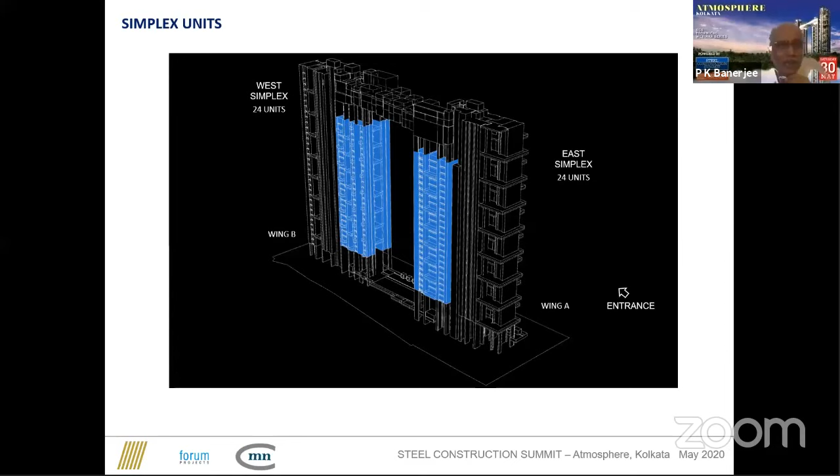So far, this building is nothing great as conceived. The greatness comes when Rahul, along with the architect, connected these two towers with a sky bridge at a level of 100 meters plus. You can see this sky bridge in this display.

This is not just a bridge - it is a steel structural bridge. The towers are made of RCC, whereas this steel structural bridge is not only for moving between towers. It is a 3-storied block comprising all the utilities and amenities a high-end dweller can expect.

This bridge has its own swimming pool, jacuzzi, kids pool, gym, party deck, view deck, spa, salon, party area, conference room, home theater - whatever one can expect for the best, higher standard of living.

All amenities are put inside this 3-storied bridge, which has made the building a landmark project. It has been captured by CTBUH also and placed in the list of unique building structures of the world. There lies the beauty, there lies the uniqueness.

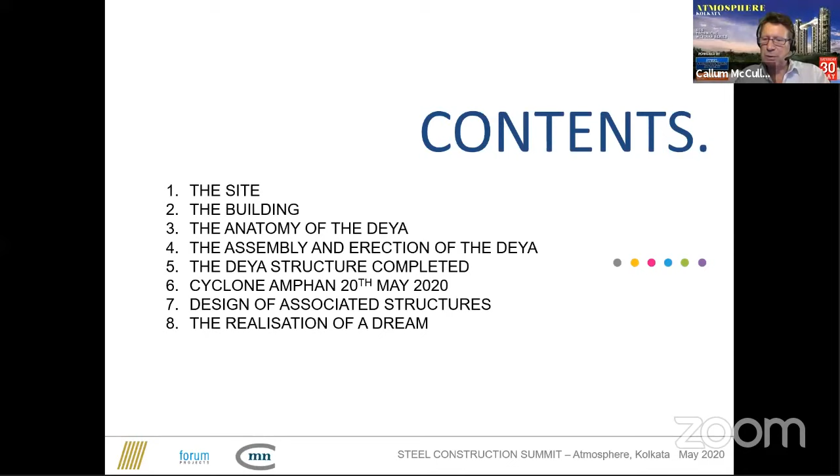It will be quite straightforward, and let us begin with where we started. We started on the site. The site was empty when we started. This was December 2010. This project has been 10 years in the making, but we do have a little bit of video here, which actually reveals PK and our client and the absolute absence of any high rise anywhere nearby.

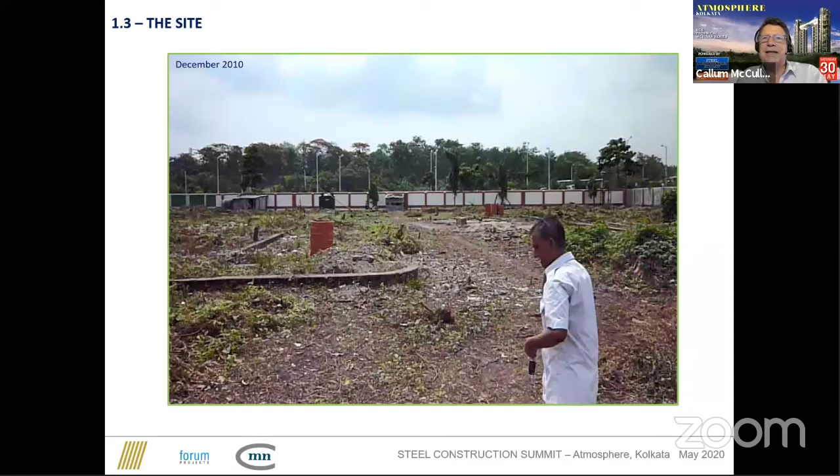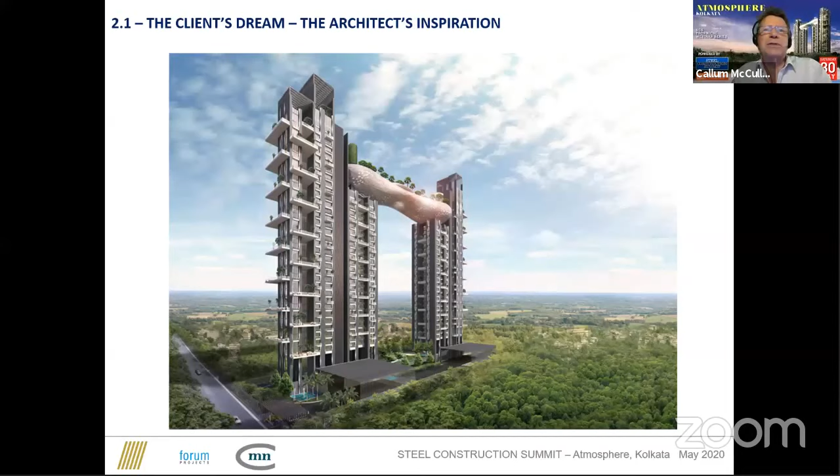The architect liked it, and we built up the whole thing into this - the architect's impression like this. Of course, the structural engineer has to become involved, and he has to do his visualization as well.

And the engineering gave us a piled raft, a single-story basement, a 5-meter high podium, which we will describe later, also known as our E-deck. Reinforced concrete frame, typically 5.1 meter story heights, very high. A big steel grillage, which we will enjoy looking at later.

And of course, the steel Deya, which sits suspended on 4 bearings between the 2 towers.

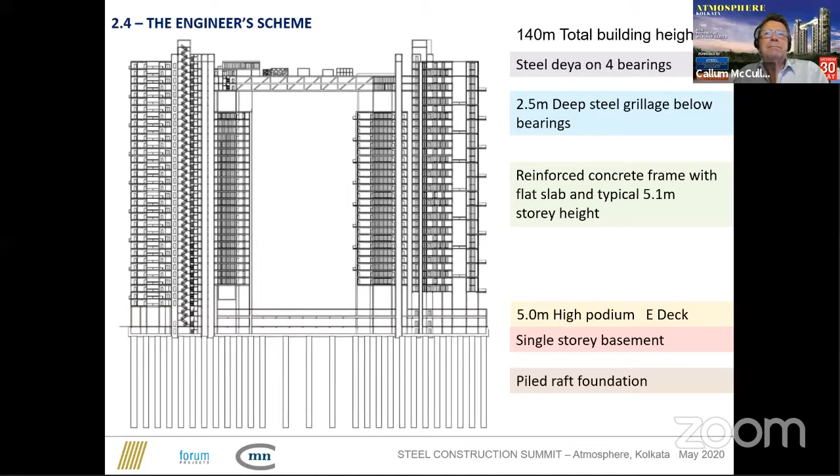Now, to think of the anatomy of the Deya - the Deya is supported by the towers. The towers use bearings to support the Deya. The Deya itself will do what it wants, but we want it to do things.

We want the towers will vibrate under load. They will move around. These ones will not move around in the same manner. They are asynchronous - we have analyzed them. They're not going to move together. So while taking the substantial load of the Deya, we have to accommodate their movements.

The Deya itself will take the lateral load from the wind, will support the swimming pool, will provide all the facilities that are required, and the bearings must interface the two to enable damping and isolation and to ensure human comfort, and also through this provide safety for the towers, ensuring that the three work together harmoniously and to the mutual advantage of them all. To do this, we actually undertook analysis.

This is analysis that we undertook, which simulates earthquake loading. Light loading, you can see the towers move gently together, largely, not much in the way of differential movement. But of course, we have to allow for the earthquakes that do hit Kolkata, not unusually, sometimes very severely. When this load is applied, then the buildings will start to move in a different manner.

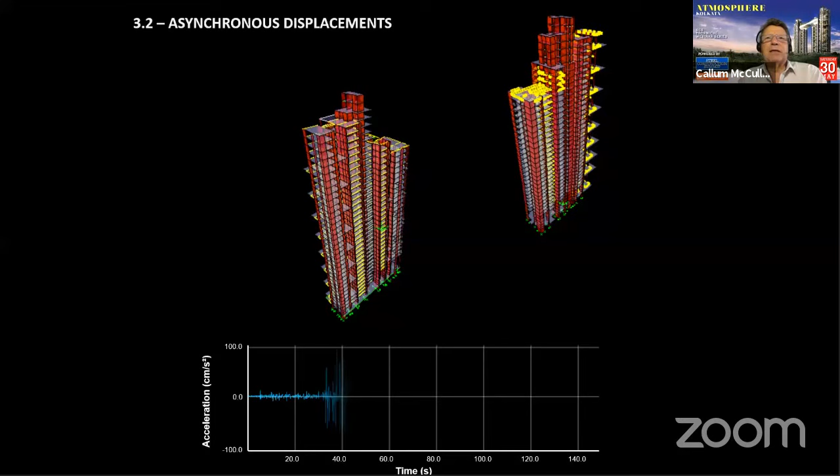They still seem to be moving a little bit together, but because of the detail of the structural arrangement, you can now see that they are starting to twist against each other. Thus, our Deya has to accommodate this differential movement between the two.

And the bearings that support that Deya have to be very carefully considered. We went through many, many options. Here are just a couple of them. We could pin at each end. Yes, but if we do that, then all the load from one side goes directly into the other side. This is not desirable load on the Deya or applied to the other tower.

We could release one end using a roller or a ball connection. This is true, but then one tower would have to support all the inertia of the Deya. That's not the best arrangement.

What we've settled upon is base isolation at both ends. All the Deya sits actually on 4 bearings, 2 on each side. These bearings are sprung loaded in all directions. So thus they mitigate the seismic demand by reducing the motion from the Deya into the buildings. It is taken up through the sprung loaded bearings.

This improves the human comfort aspect because the Deya itself acts as a damper on the buildings. In the same way as a tuned mass damper or a hydraulic damper would do, our Deya provides damping for the towers. And in addition, the spring nature of the bearings means that they are restored to their original position after any event that causes them to move.

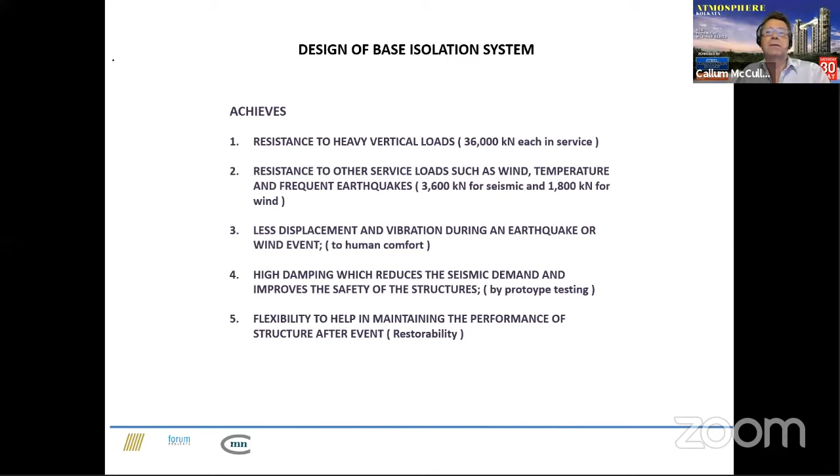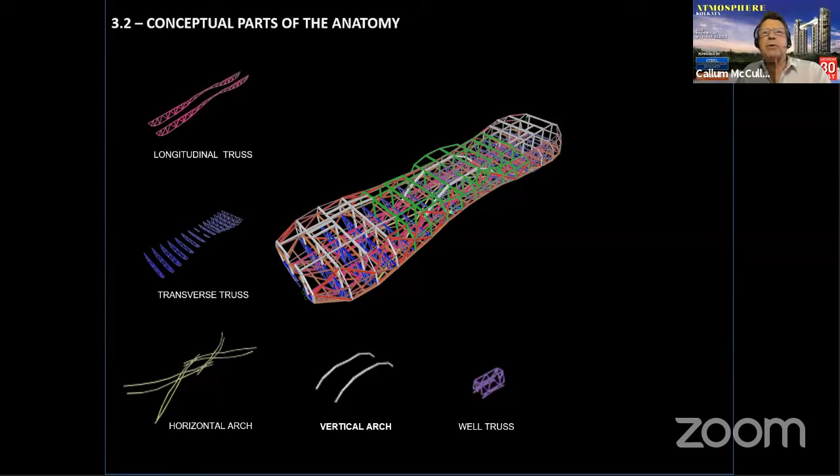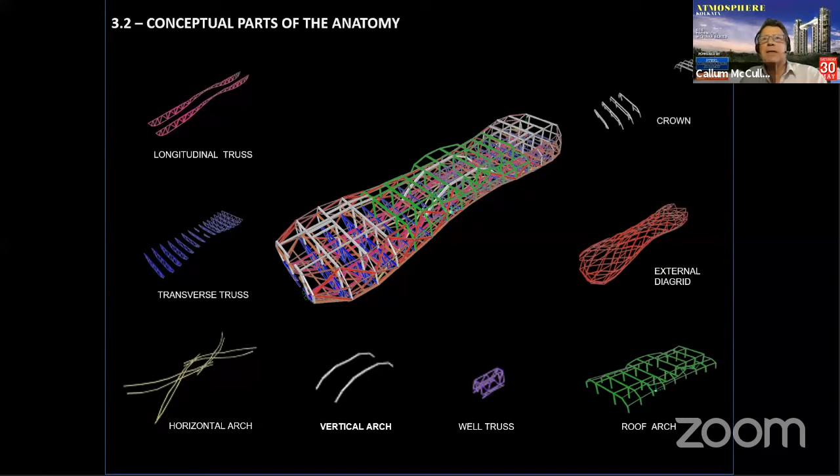Because of the shallow cross section in the middle of the structure, a vertical arch, which you can see here, was added to strengthen the longitudinal truss. In the middle, there's an oculus. A separate truss was required for that because it disrupted all the other trusses. A roof arch to start providing space. Externally, a diagrid to provide rigidity into the Deya, resist twisting effect, and provide a surface on which we could start building the cladding. And at the end, to suit the architecture, there was a crown required.

That was the design. But in addition, we had to consider other aspects. Once we had a structure that worked, we had to add in the final condition additional members which were required to suit the erection process.

So these characteristics, these loading was provided by Eversendai through our checking systems, and we doubled up wherever we could. Then we had additional elements for additional floors, which did not form part of the structural framing, which we had to add in. And in addition, our client very sensibly had bought a load of steel, and there were certain cross sections, certain sections that were determined by the availability of material. This was, we considered to be a good green move rather than producing loads more steel unnecessarily.

So all of these things provided a refinement, shall I say, to the anatomy of the structure. Then, having decided on this design, is how to assemble it, how to put it together.

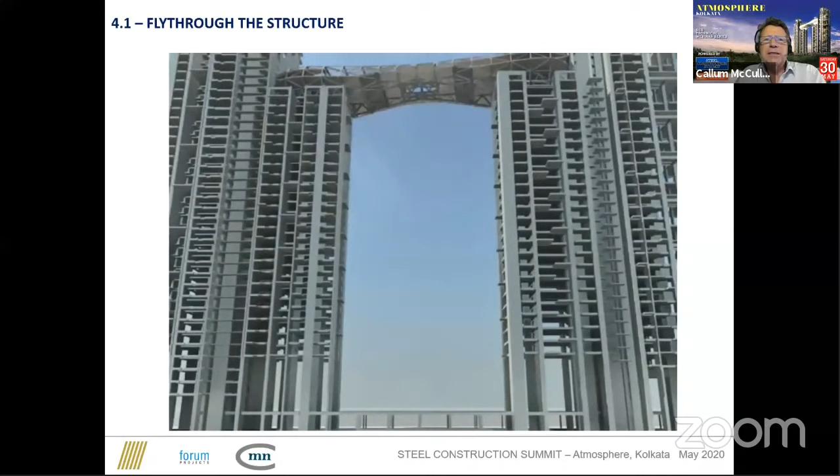It's high up, it's complicated. We have an area here that we could work away from. We have a very robust structure on either side. Flat slab structure, very, very few beams, but very eccentrically loaded.

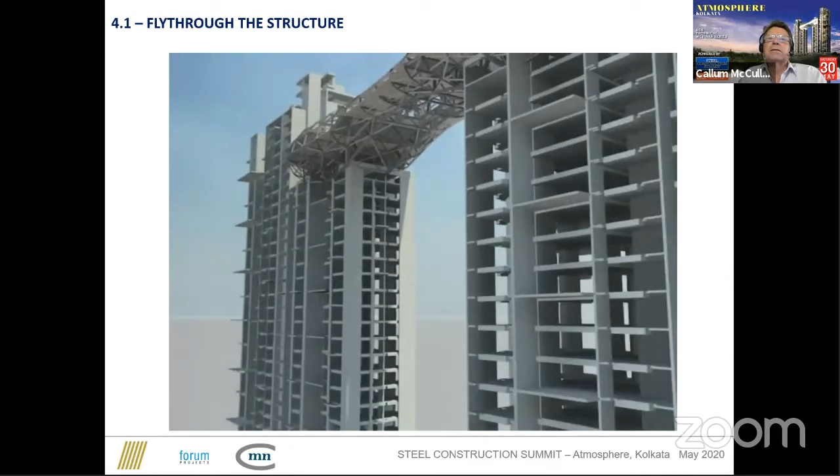Coming up to our Deya, how do you put that up there? Well, the first thing you need is a very solid landing strip for it. This is a view onto one of the grillages that support the bearings. These beams are 2.5 meters deep each. And because, as you will see, the towers do not line up, they are eccentric because of the skew that exists on the loading.

These are taken down into the concrete walls of the main tower below. To fabricate the Deya, this was going to be done in Tiruchirapalli, Trichy, for some of us. It was decided that we would fabricate the nodes to start with and ship them up individually, assembling once we got to site.

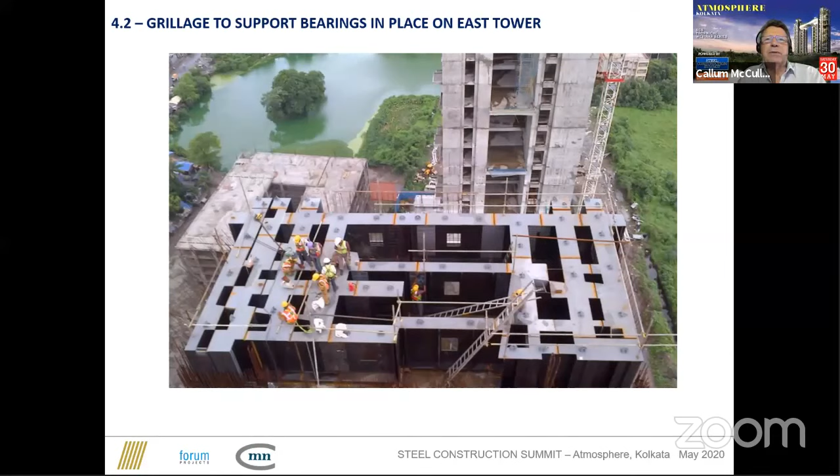When the details started to arrive, we discovered that some of the nodes were extraordinarily complex. You wouldn't really like to put this on a drawing board and try to draw it out. But with the expertise of our colleagues at L&T and Eversendai, joints such as this - and this is not the only complicated one - were designed using computers.

They were cut using computers and welded using computer-controlled techniques. This was quite impressive. The bearings themselves, we said, have to accommodate large amounts of movement. They have to take a great deal of load, both horizontally and vertically. We had these fabricated, designed, and detailed to our specification in New York State in the US.

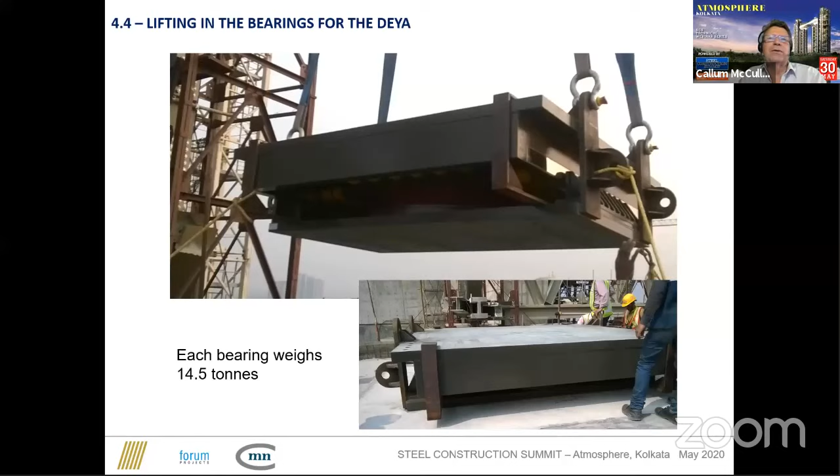Each bearing weighs 14.5 tons, is about 2.5 meters square, and there are 4 of them. It was a big day when we finally got those started on site.

So with the bearings in place, the component parts of the Deya are with us, and we then started erecting both up on the tower, as you can see. If you look at the recessed sections, we have assembled part of the Deya, but we've also assembled a fairly substantial amount of temporary works to hold the Deya down as it's going to lift up a section in the middle.

And we will also fabricate on the ground. Looking down on the ground, this is the section that we will lift. Some 500 tons of steel will get lifted using strand jacks on each corner.

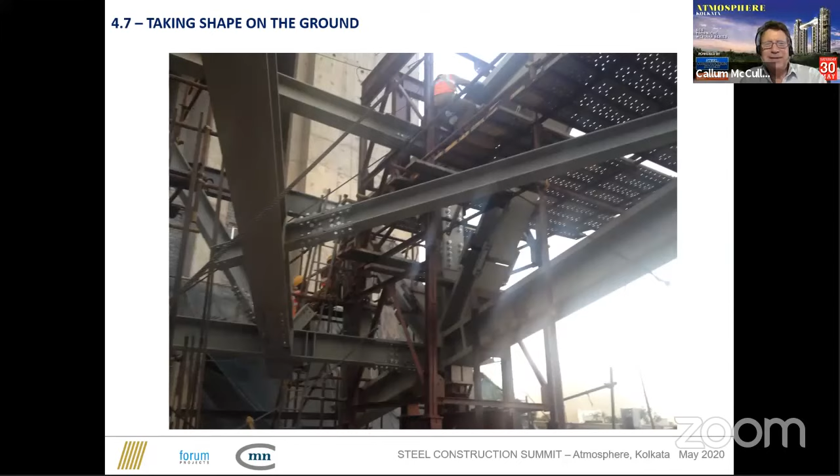On the ground, the steel starts to acquire a scale - it was bigger than it was on the drawings. It was complicated, but it all went together incredibly well despite that.

You can see here the arches that go over the center area. The gray paint is intumescent paint, providing fire protection. Work carried on day and night.

Let me now pass over to our colleagues who were most closely associated with the work on site.

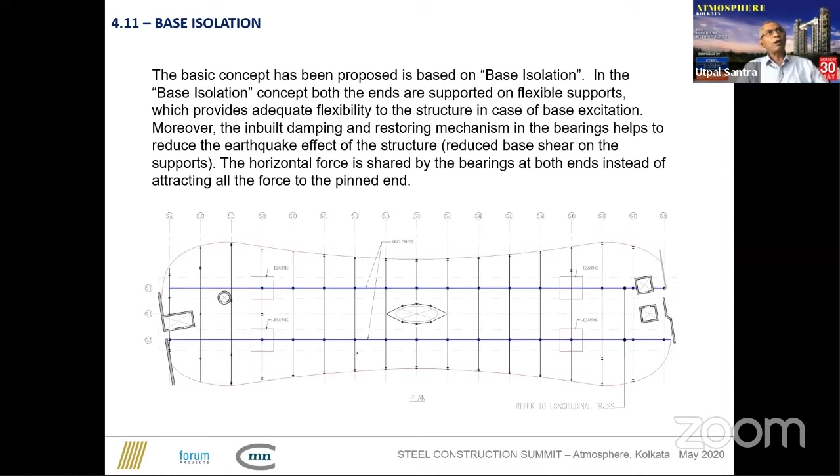We tried several options—as Kalam said, pin, pin roller—but none of them gave us the right result. So what we thought is, let's not free off the load. Let's keep the load, but tone it down so that the building will be capable of taking that amount of load and behave to our satisfaction and to human comfort also. So what will be the material? That material we thought of is base isolation.

It's called the seismic base isolation bearing. It was designed in New York by R.J. Watson, and manufactured by Mageba and supplied to us. As Kalam also said, each bearing weighed about 14.5 metric tons, and it was a job to lift them up at that level. Mind you, these type of things we have never done—nobody has done in their life. So all the time we had to do some firefighting, and we came out successful, and it's a pride that we have done it. Now you see what the bearing has really done.

Now the earthquake load—the total earthquake base shear—is 1,440 tons, which by virtue of this bearing has been toned down to 180 metric tons in each bearing. So you can see that each bearing, with the load that was supposed to come as 360 metric tons, has toned down to 180 tons, which was manageable. So that's really what the bearing is doing—it has toned down the load to approximately half of it.

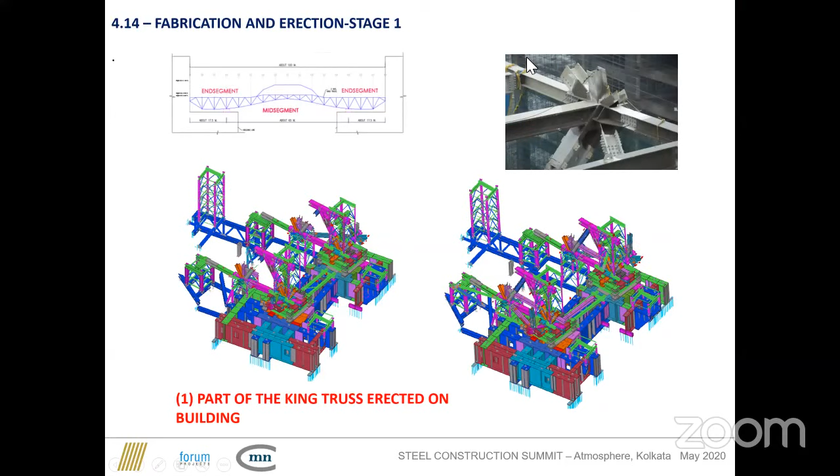So what Kalam said, it was again a job for us to fabricate and erect the entire monster and do it there. Now you can see we divided the entire bridge into three segments: the end segments, two on either side, and the middle segment.

The end segment was sitting on the building on the bearings and was fabricated on the building itself. You can see it there. Part of the king truss is sitting on the building and being fabricated, and there you can see the post coming up, which will hold the strand jack on top to lift the mid segment together from the ground.

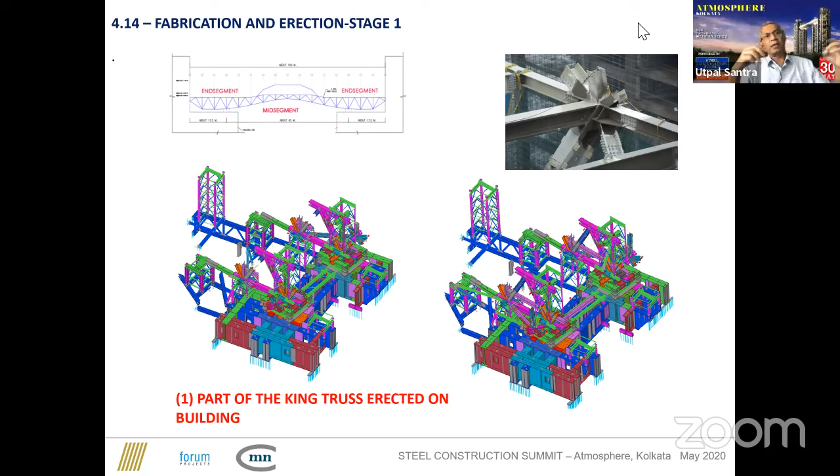Now, next slide, please. Okay, next slide. Yeah, it's done.

Now this part of the king truss is there, and the transverse truss is being attached. You can see one of the joints there at the top corner, how complex it is — my goodness, it was not possible for us to make a drawing of it. It had to be a 3D drawing, and we used very sophisticated software to do it.

You can imagine how complicated it was. The transverse truss was provided to connect the two king trusses, so that the shape and stability of the king truss was also established. This end part is acting as a bracket on which the mid segment will be placed — you'll see how the mid segment will be placed there. While lifting it up, the strand jack etc. is placed on this end bearing and the end segment, and the end segment was designed with a cantilever design to carry the entire load of the middle segment.

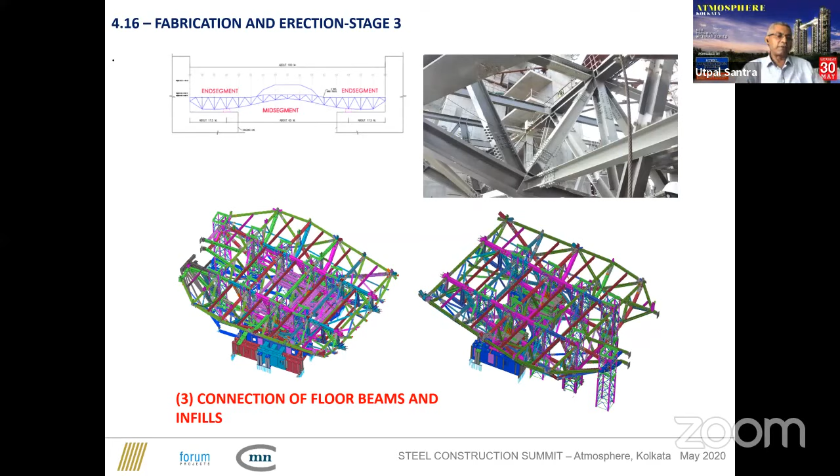Now you see the mid segment, the middle part assembled on the ground, being lifted with the strand jack on top of this building at the 100 meters level, and the middle part has been joined there. After joining, the entire truss — the king truss and the top arch — is taking the entire load. Now it is stable, but while it is being lifted, the end segment has to take the entire load as a cantilever, so we did a temporary design for that, so it was capable of taking the load. This was a later addition to the design we had done earlier.

While lifting this thing, it was done in the time of summer, and in Calcutta, as you can understand, cyclones and nor'westers are quite frequent. We frequently see those things which can disturb the entire erection process, and swinging of the entire bridge can happen.

So what we did is we provided some wind arresters in the buildings, and you can see these are marked. Suppose while erecting, if the entire bridge swings due to a cyclone or storm, we can temporarily lock those in these arresters and not lift it up. When the storm is over, we can lift it up again. We provided that at different levels.

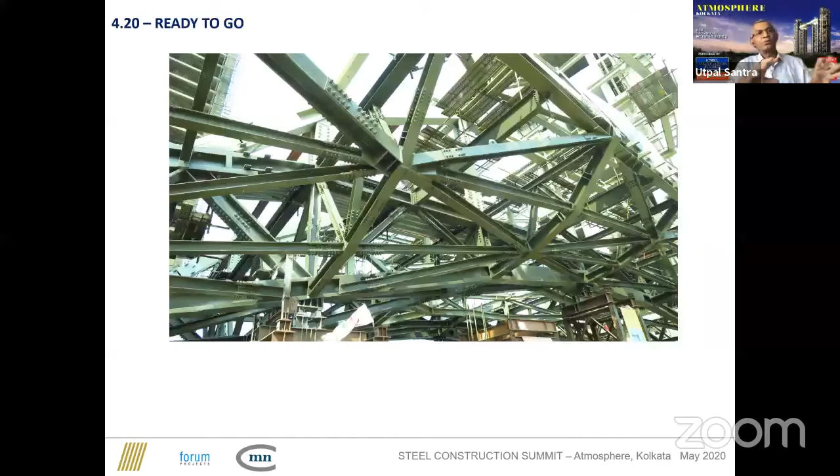Now it is complete and ready to go up. From the pillars, it has been released, and it is about to start being lifted. Ankit, there it goes.

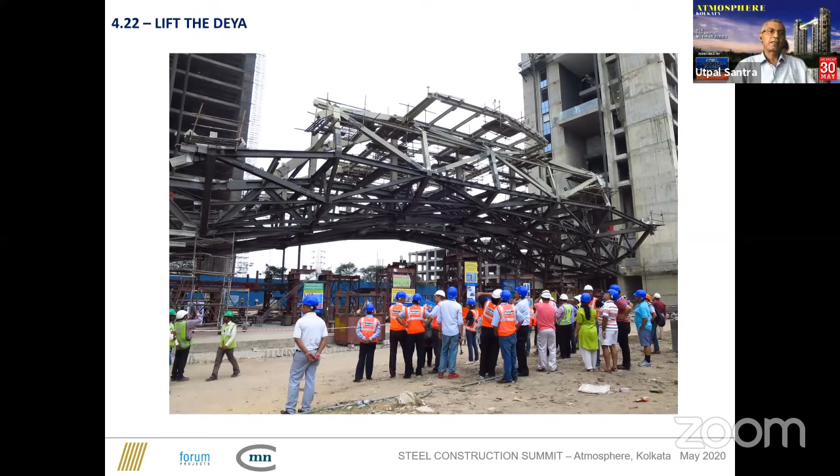Ankit, next slide please. There it goes - the temporary trestles on the ground have come up from that. No support is there; it is hanging from the strand jacks from the end segments, and it is getting lifted slowly. The speed was very slow.

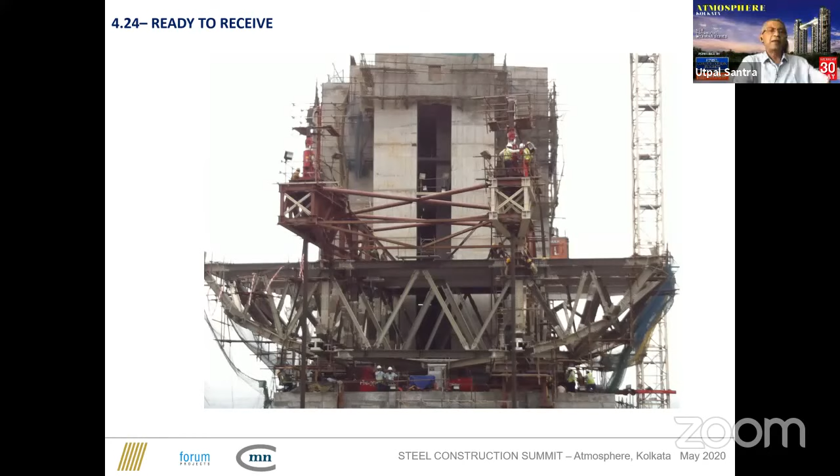Now the concreting and other things will be in place. Enjoy the video - it shows the entire erection process.

Mind you, this has been recorded at a much faster pace - it was very slow in reality. But you can well imagine the complexity and the pain we took in doing so.

Don't get afraid with the leaning of the towers - it is a distortion in the picture, so don't get worried about it. It seems it's getting stuck there, but don't get worried - it was a distortion in the picture.

Well, there it comes. There it goes.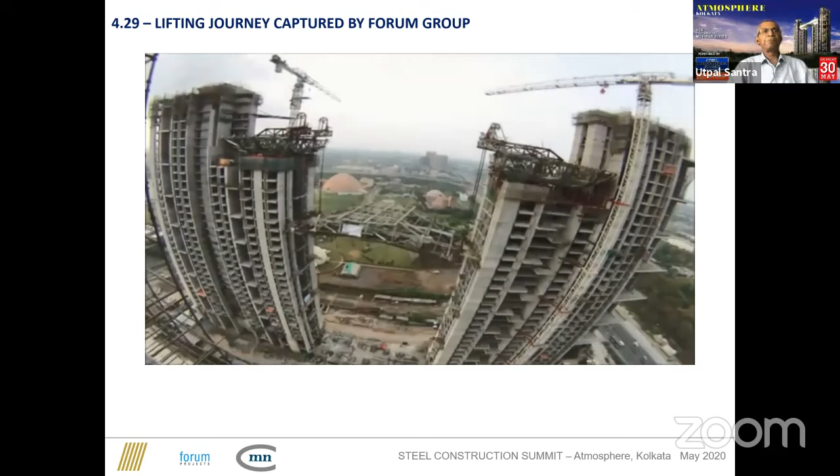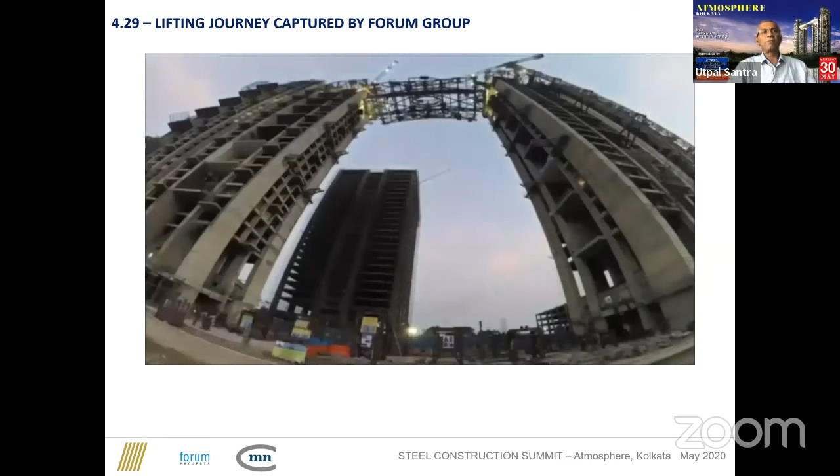We were continuously monitoring the erection process to check whether there was any difference. We talked with the contractor and allowed some minimal rotation slope during erection. We kept control over it so it wasn't tilted to one side, which would cause one jack to take much more load. At this point, I remember a storm came and we stopped for 2-3 days, checked everything, then re-erected. The entire process was completed on the 6th day probably.

Yes, now it is there. Thank you very much, it's good. Thank you very much. The journey was done.

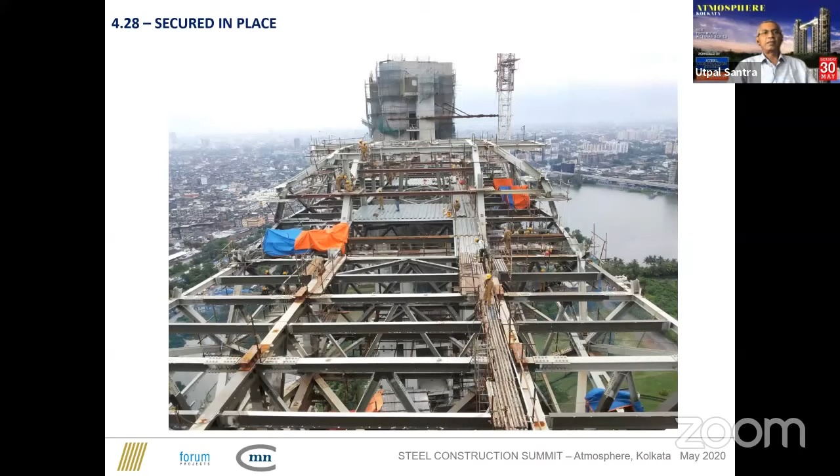But it is now secured in place. The concrete is being done, and a series of checks have been done at site - non-destructive tests, bolt torquing, site welding, all done, magnetic particle test. This first episode concentrated mostly on the design part and erection part. The quality control and checking will be covered in detail in another episode, as it's itself so complicated. We did quite a number of checks, during fabrication and erection, and signed off on all of them until we were satisfied.

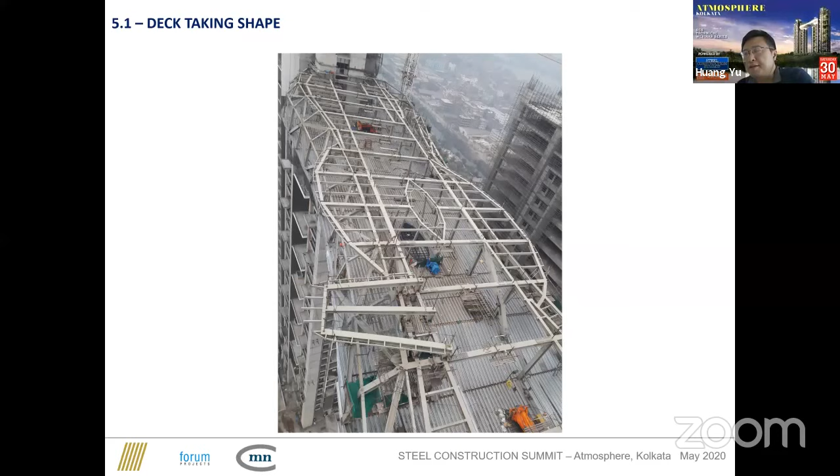You can see here the work in progress for the external diagrid structures, and this is for the facade. Eventually it will be applied. And this is another view of the external facade diagrids.

After finishing, they will go up to the top, which is on top of level 34, if I'm not wrong. So this is for all the facilities, including the swimming pool and view deckings.

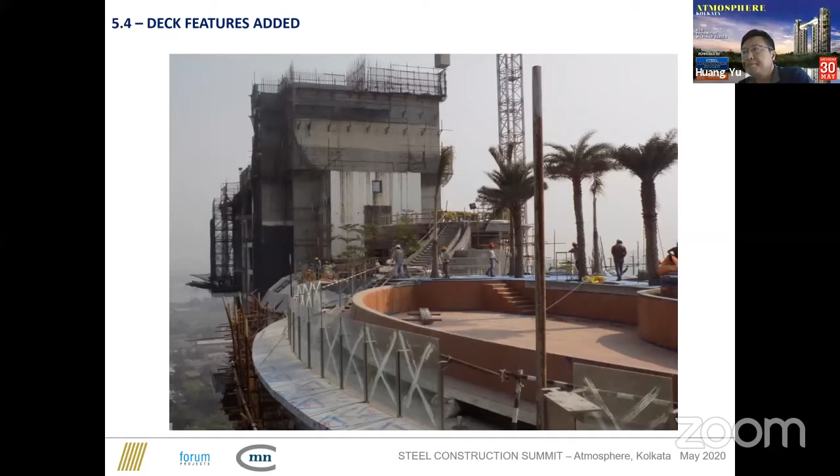Looking from the top, we can see after nearly finishing the deck with a steel structure below, but with all the facilities and all the staffs on top.

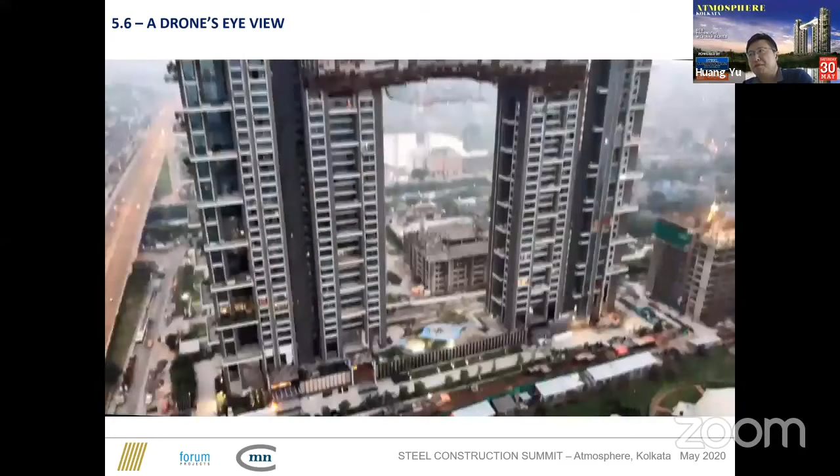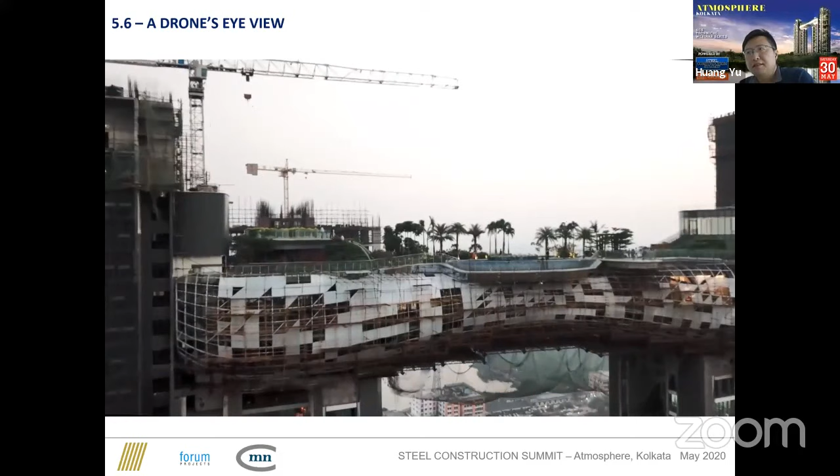Please enjoy these videos which we took from the drone. So we're looking from far and moving near to this huge structure, just spanning from one tower to another. The facade cladding is in progress.

All right, so this is the finished part 5. Let's go to part 6 next.

Just a couple of days back, there was a cyclone on 20 May. I think everyone knows, this was a very severe wind event with a huge, so-called large wind speed, almost close to the design wind speed.

This shows that after this wind event, there was very minor or even no damage to the structure, of course even though there was damage to the finishes and the cladding. After inspection, we found some minor cracks to the ceilings. So this gives very good testing, I would say, to the structure in terms of the performance of the deck.

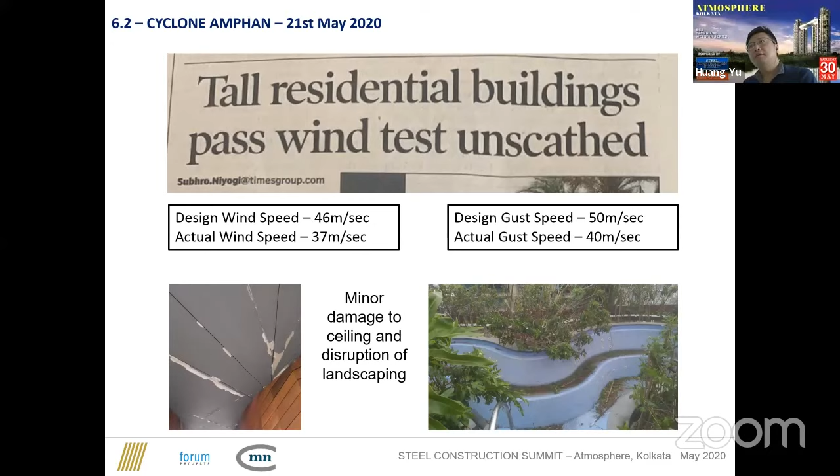Hello, good afternoon everybody. Very good explanation by Callum, Huang Yu, and Utpal sir on how the main structure of Deya was built and placed at site. But along with the main structures, there were a lot of associated structures which played a huge role in making what Deya is, and there are hundreds. So we are just talking about 2 structures right now and the importance of this.

But in the atmosphere, all the detailed small structures were done with precision engineering and precision construction. So you can see a sky garden with so many trees at the top, at the 100-meter level.

When the trees are at 100 meters and there is a wind speed of 150 kilometers in the gust, there's always a chance of this getting down. And if somehow this falls from the top, then it can be a catastrophic failure.

But with precision engineering and design, we were able to make these trees' foundation such that they could withstand this pressure. So there were very different types of trees, what landscape wanted, and we wanted to give them a free hand so that their creativity is not lost.

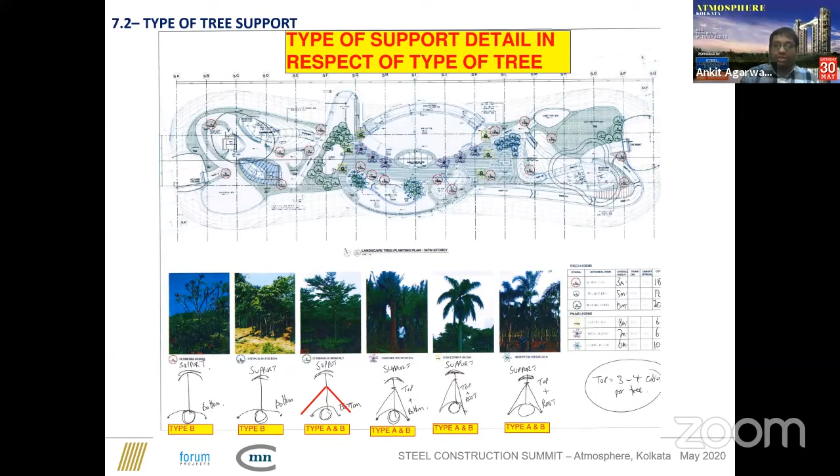This is a basic sketch showing the trunk support, which was done at the top with a steel collar, and all the things were done with galvanized plates and SS wire so that it does not get rusted in the wind and the rains. There is a drainage arrangement at the bottom and a planter wall, but we did not take any support on the planter wall. Everything was supported in the steel deck below with a pedestal on top.

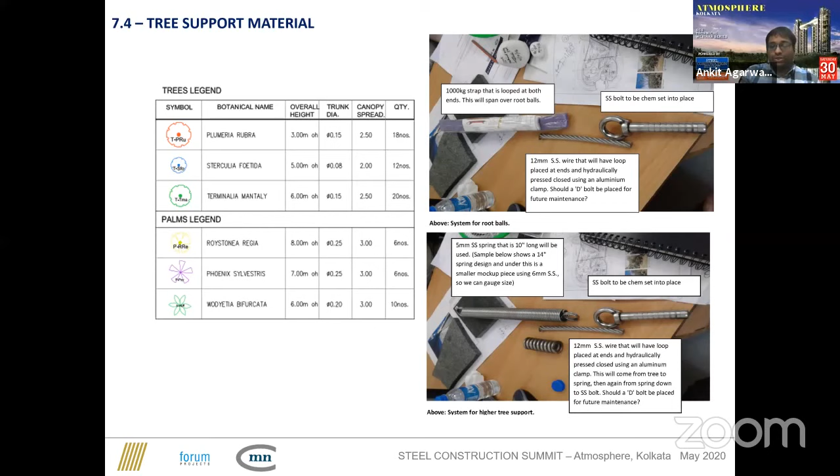These were some of the detailing which we did, and a lot of things were changed on site also. The SS wire was anchored in the pedestal, which was getting supported from the deck sheet and the concrete that we poured. We used special chemical anchors from Hilti to get the support and strength needed. Above that, plates were installed so that we could tie the SS wires to them.

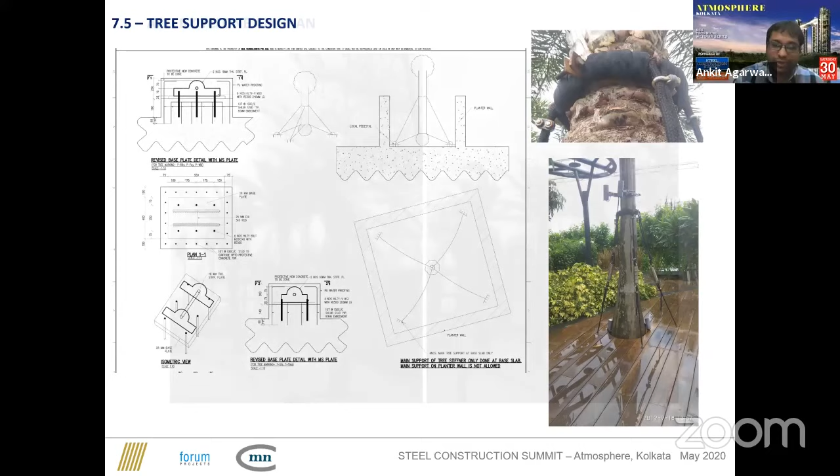These are pictures of the trees after the cyclone, taken just a few days back, and everything is all right. None of the trees have been damaged or distorted.

There's one important structure with Deya. With the 2340 tons of Deya, there was a temporary structure of 400 tons of hanging scaffolding, without which we could not have built what Deya is right now. It was itself a challenge making a hanging scaffolding, and as the name suggests, it was hanging from the main structure in the sky.

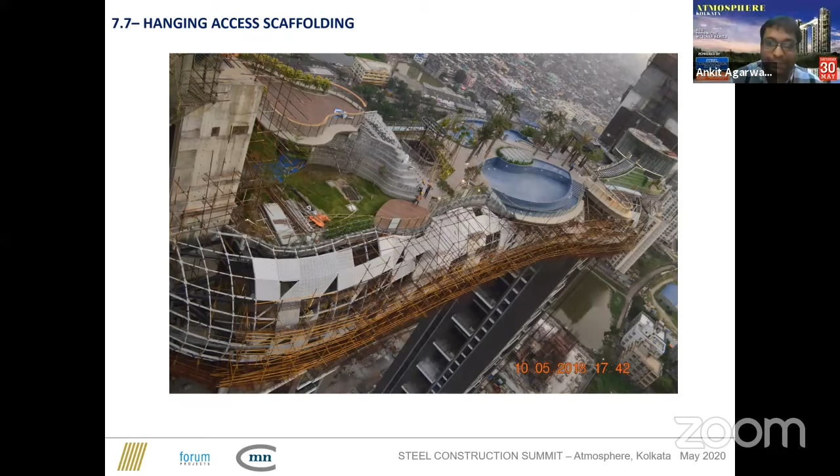So this is, if you can see the blue below, there were platforms hanging below from the sky. And on the top, if you see the plan, the hanging scaffolding was needed everywhere to do the facade, the structural work, everything - whatever plumbing work, MEP work, everything. It itself was a challenge.

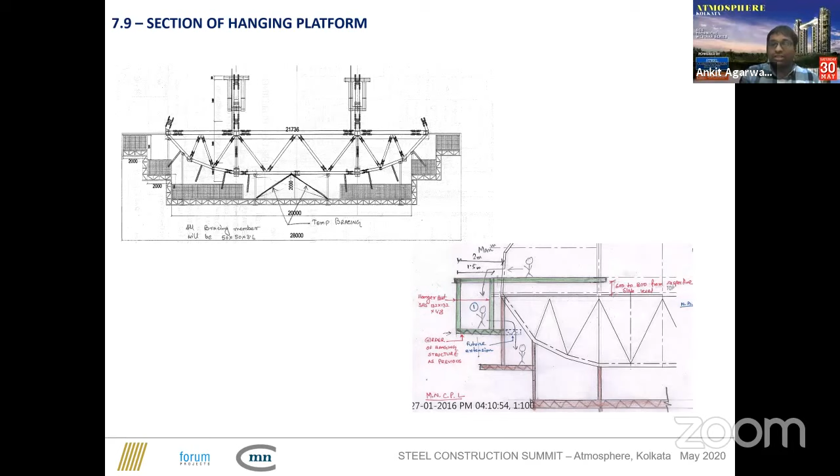These were some of the earlier sketches we did. A very important part of this structure was that there were huge intumescent paint layers, 6 or 7 of them, and we couldn't damage these paints while making these temporary structures. So we had to introduce a system of bolting such that it hangs the platform and the columns, but still does not damage it, and we were very successfully able to do it.

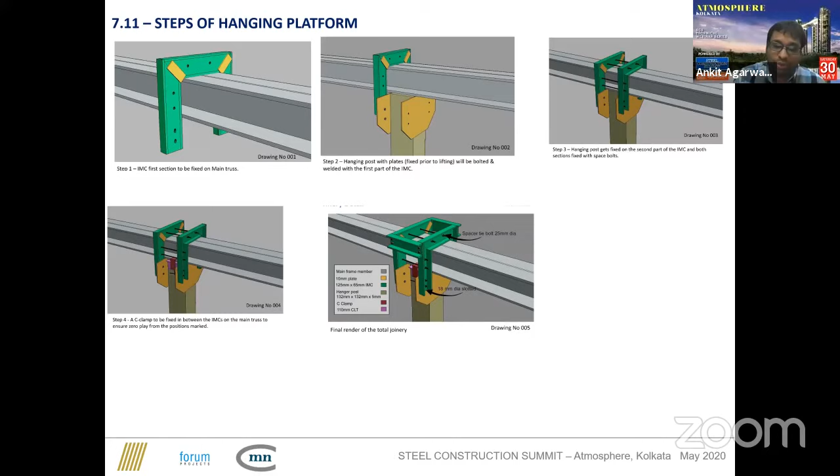These are some of the sequences in which it was done. We had placed an IMC section at the top, on both sides, and then the bolting was done, and from that the column was hanged below.

Now I'd like to hand over to Mr. Krishnendu from Forum to take you a little bit through the construction process and a visual treat of what is inside there, which is also itself a treat. Krishnendu, handing over to you.

Thank you, Ankit. So before Krishnendu, just a moment. Yes, sir. I find more than 200 participants here - it's a great pleasure for us.

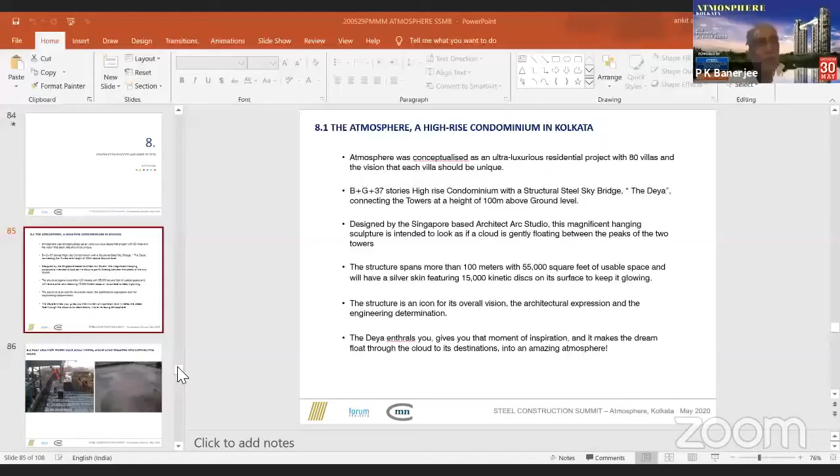While I spoke, we went through the journey of tedious design engineering and saw the intricacy and complexity of the design. In this entire journey from conceptualization, dream conceptualization, to the design, to the construction and erection, I must mention that the principal architect of this project was Arc Studio, Singapore, led by Mr. Min Beng and Mrs. Belinda, supported by our Indian architect Mr. Sandeep Agarwal and team, Practice Architect India. And then, finally, to bring it to reality, our team developed with L&T, Larsen & Toubro, to do the construction. And for the steel structure, along with Larsen & Toubro, Eversendai was introduced to make this dream into reality. Now I hand over to Krishnendu, please carry on.

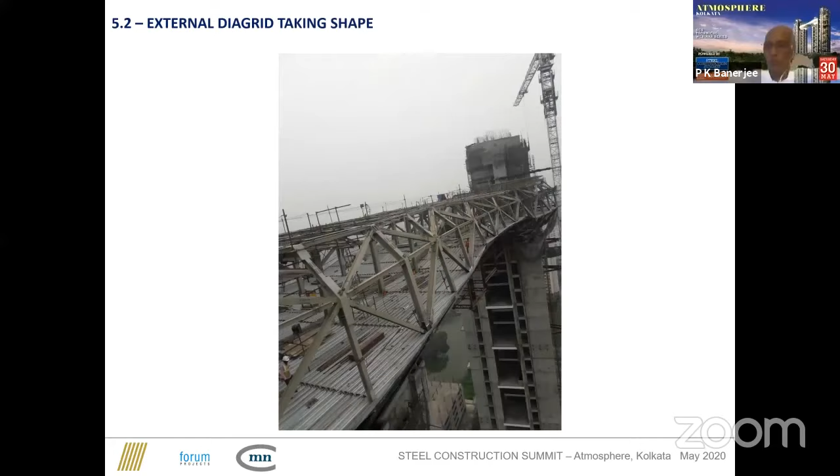Thank you, sir. Thank you, Ankit. Good afternoon, distinguished panelists, moderator, and all the participants in the webinar. First of all, I'd like to thank MX Business Media for inviting us to this webinar.

While the other panelists discussed the engineering behind the Deya structure, I will take you through the finishing stages of Atmosphere, including Deya. So before I start, I'd like to add a few important features of the project.

Atmosphere was conceptualized as an ultra luxurious residential project having 80 villas. This is a B plus G plus 37 storied high-rise condominium with a steel structure we call Deya, which we've already discussed a lot. Designed by the Singapore-based architect Arc Studio, this magnificent hanging sculpture is actually a cloud gently floating between the peaks of the two towers. The span is more than 100 meters with 55,000 square feet of usable space, and will have a silver skin featuring 15,000 kinetic discs on its surface to keep it glowing.

This structure enthralls you, giving you a moment of inspiration. As discussed by all the consultants, their designs and dream have come into reality - we are almost there. So thanks to L&T, Eversendai team, and the entire Forum team for making this happen. Now, after the erection of the entire structure - Ankit, next slide please.

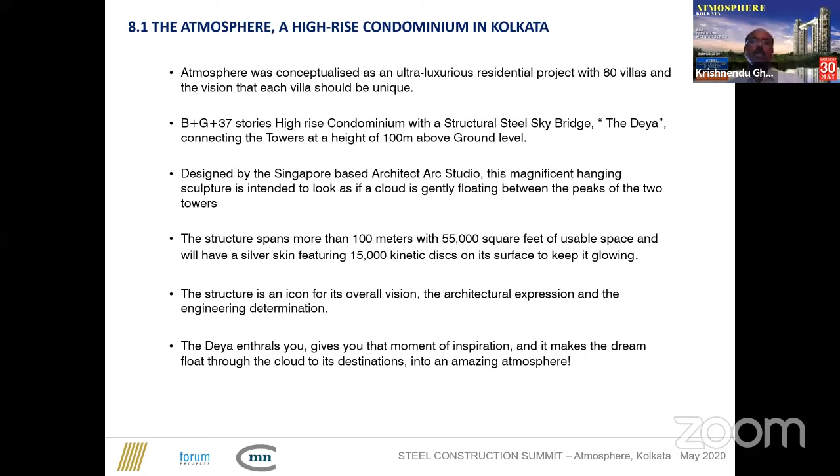Ankit. It's coming... Yeah, it's coming.

Now another important thing I'd like to add is the waterproofing of the entire structure, because it is a very difficult structure. As you see from the top view, it's a curved structure, and width-wise at the central portion it is 27 meters and at the side it is 22 meters. So it is not at all a uniform structure, making it very difficult for us to execute this waterproofing.

So 3 types of waterproofing were used. In non-wet areas we used PU membrane with anti-root properties, because there are trees all over there. In wet areas we used 2 types of waterproofing: one is crystallization, which we mixed with the concrete before pouring, and after concreting was done, we used polyurea membrane. This was basically used in the jacuzzi, the infinity pool, and the kids pool area.

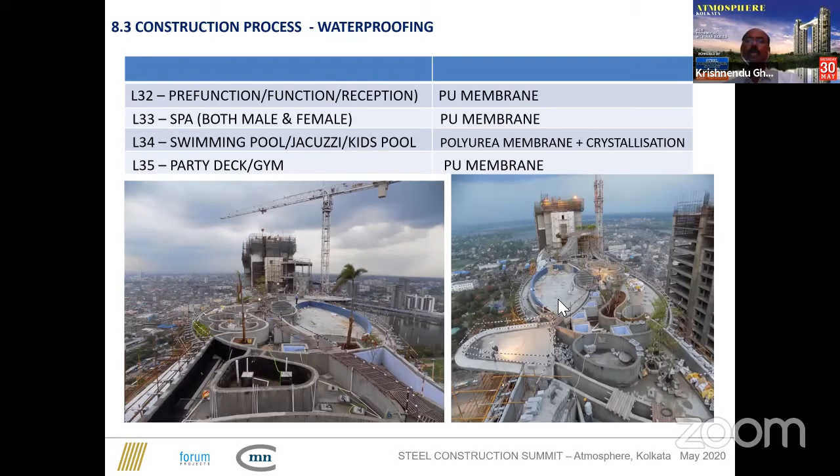Ankit, next slide. Ankit, yeah.

Another point Ankit mentioned is that we have used intumescent paints, 2-hour fire-rated intumescent paint, with thickness varying from 10 to 12 microns up to 35, 36 microns.

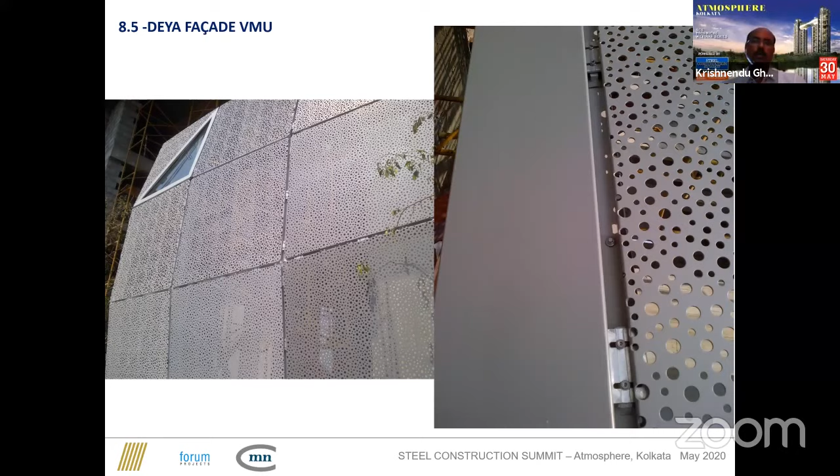So once the visual mock-up was completed, we did the same thing in the actual construction on site, which has been done by Mero Asia.

Now I'd like to start the journey from the entrance level. As you enter from the gate, you will see a guardhouse portal with 4 entrance canopies, which are connected with the lobbies, where each tower has simplex and duplex lobbies connected with the entrance canopies. These canopies are made of rectangular hollow sections of 150 by 90 millimeter size, and the sizes of these canopies are almost 9.2 meter by 9.6 meter, having a height of more than 5 meters, with a cantilever projection of 3.6 meters on each canopy.

And these canopies are covered with aluminum powder coated sections, and the infills are covered with laminated aluminum sheets with PVDF coating and glass. So these are the entrance canopies you are seeing, this is for the simplex and duplex, all entry levels have these canopies.

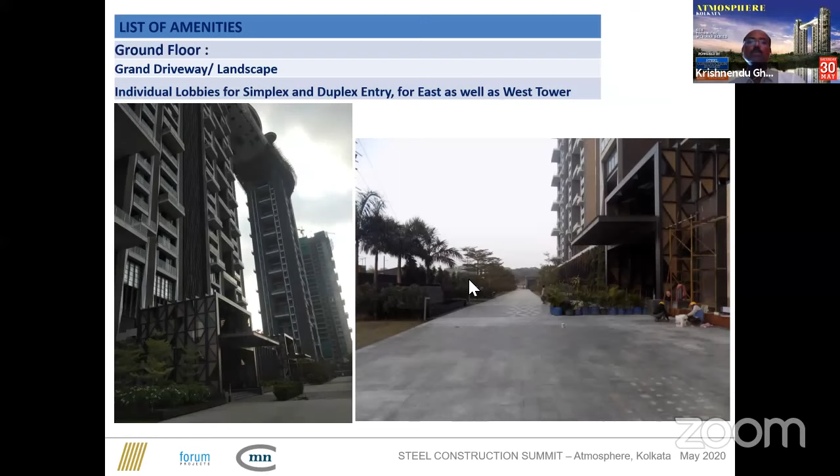And there is another interesting thing, a grand driveway followed by landscaped areas all along the ground. On either side of the driveway, we have landscaped areas, which are basically meant for the parking areas.

And now I'm taking you to the Deya structure. Now Deya, you have seen the skeleton of the Deya structure. Now let us see the finishing of the Deya. It starts at level 32.

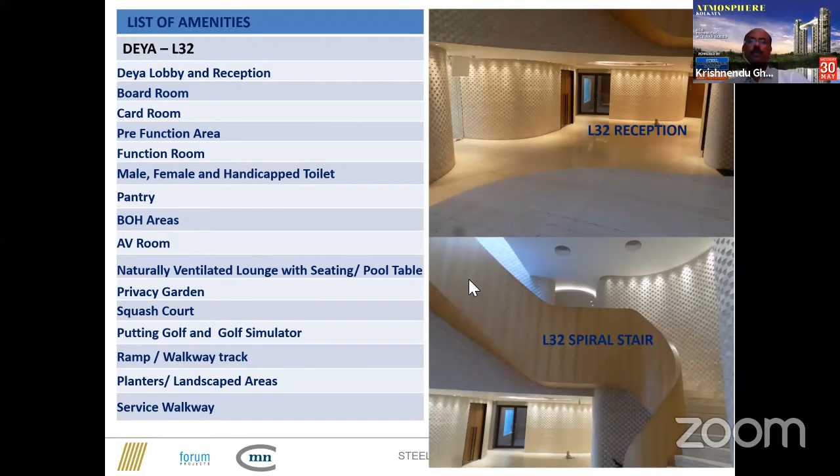Now you see the photographs, the reception areas and boardroom. We have a boardroom and card room. We have a spiral stair connecting level 2 and level 3. And we have a naturally ventilated lounge with a seating pool table. We have a squash court at this level available, which is already finished.

Ankit, please show the next slide.

We have an audio video room in this level, and this is a squash court. You can see the views of the skylight.

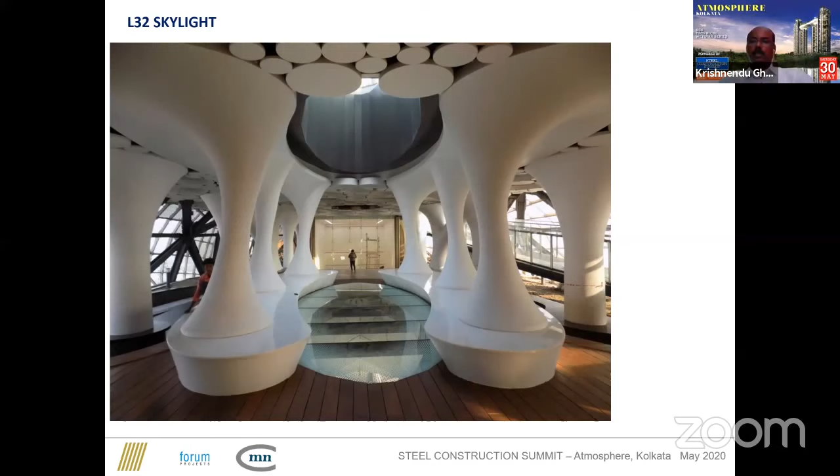Next slide, Ankit. The rondo ceiling and the encased columns - these are all structural columns that have been encased with GI framing work and POP.

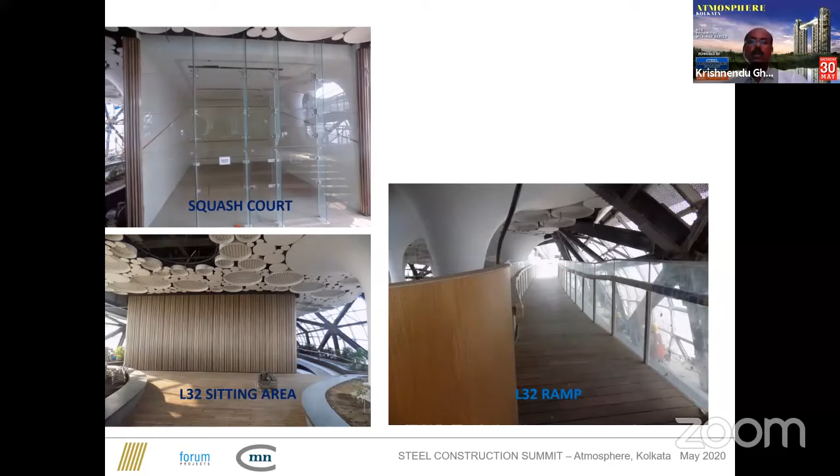This is the photos of the squash court, sitting area, and the ramp which connects to level 3 - level 34 - which has all the amenities like swimming pool, jacuzzi, and kids pool.

Now the second level, which is level 33, has separate facilities for male and female. We have a spa here with sauna, steam, jacuzzi - everything is available on this level.

Now we are going to level 3 of Deya. This is level 34, which is open to sky, having all wet areas and landscaped areas.

We have a swimming pool, a lawn and party deck, multi-purpose deck, kids pool with slide and jacuzzi, and a rain dance pavilion.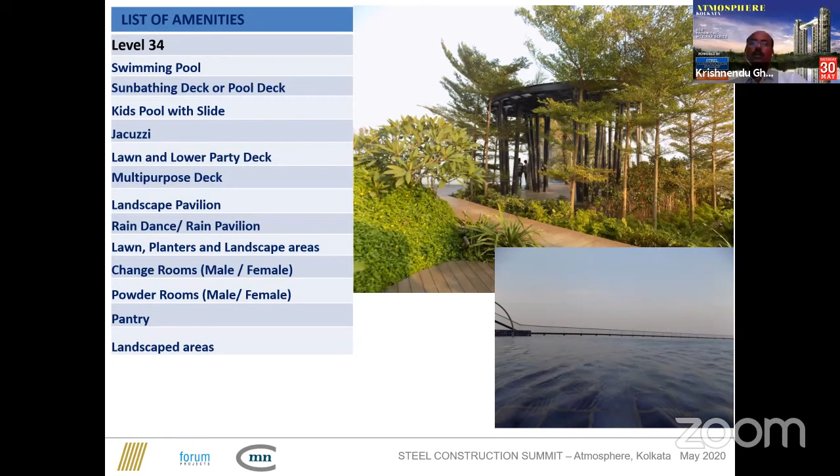As Ankit has already shown you in the previous photographs, we have tall trees of more than 18 to 20 feet. This is the infinity pool, and photographs of the jacuzzi.

Next one, Ankit. This is a viewing deck, rain dance area, and changing room - all these facilities are there at level 34.

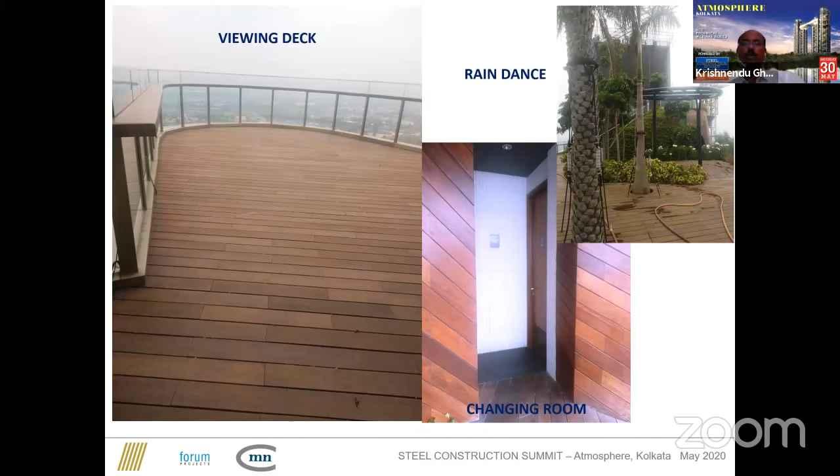Next one, Ankit. Now we are taking this, at level 35. On one side we have a gym, on the other side we have an open party deck.

These facilities are there, and we have dedicated lifts available at Deya which will cater to 3 levels, from 32 to 35. Now there are some fact files for Deya.

Deya as a forum - we are the developer of this forum, this atmosphere project. The main architect, Mr. Banerjee, already mentioned, is Arc Studio from Singapore, with Practice Design from Calcutta.

Structural consultant Web and MN Consultants, both present in this webinar, and the main contractor is L&T, with steel fabrication done by Eversendai. The steel tonnage used is almost 2,340 tons of steel in this project.

In this project, occupancy has already started. Next one, Ankit. Next, the last slide.

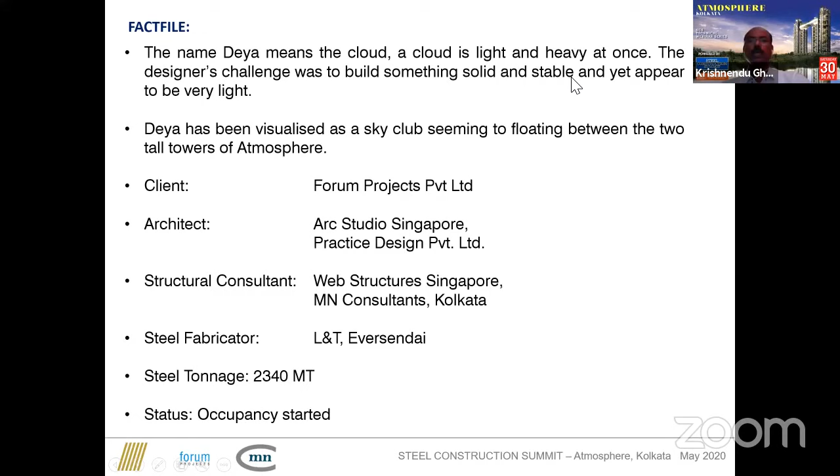Now I would like to discuss a few important aspects of Deya. First, the structure of both towers of Atmosphere needed a strong base to hold the sky bridge in any kind of weather and during an earthquake. That's already been discussed in the earlier presentations.

Secondly, the UC sections, which Utpal has already discussed - a few of these sections are not readily available in India, so we had to procure them from Corus, London.

Thirdly, there is a potential risk of movement of the sky bridge, so every movement was monitored during the lifting work. During lifting, the vertical deflections were monitored.

And finally, the entire sky bridge load is transferred into Eradiquake isolation bearings placed on two points at each tower. So the construction of Deya makes one realize the flexibility of steel.

We are part of this team, and it has been an absolutely unforgettable and unique experience for us while executing this project.

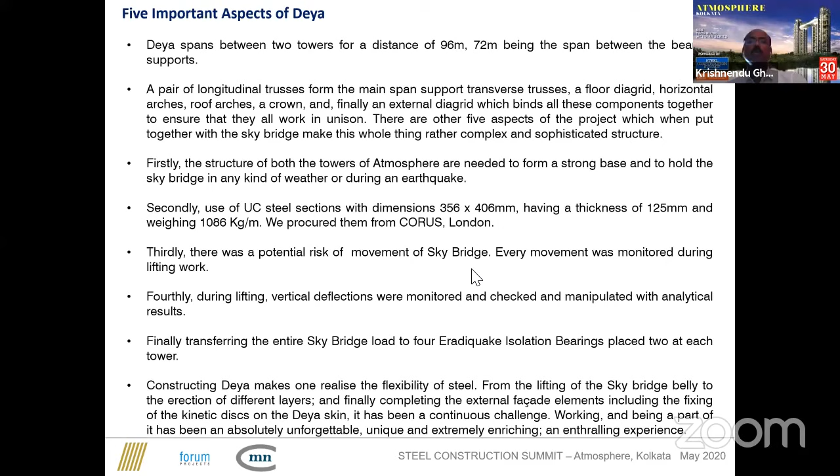There are another two last points I wanted to discuss: this project has already been selected by Nat Geo and telecasted in the series called Mega Structure, as Mr. Banerjee has mentioned.

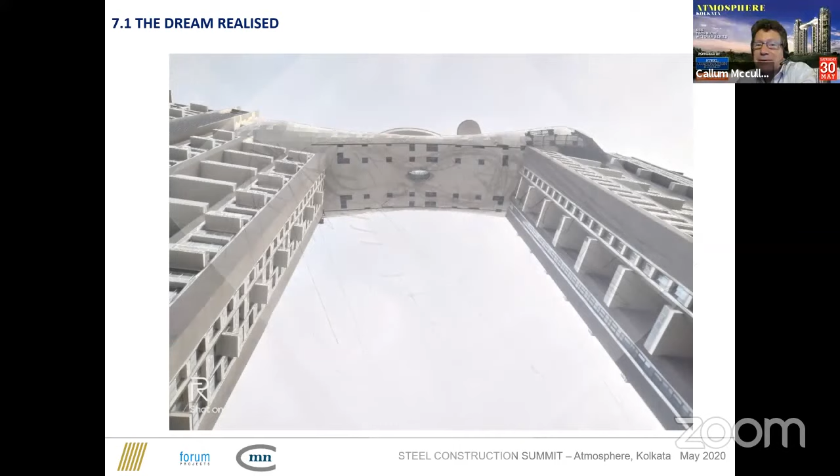Next slide. Now you can fly around it, you can see it, you can live in it. That was backwards - let's go forwards. Yeah, let's go.

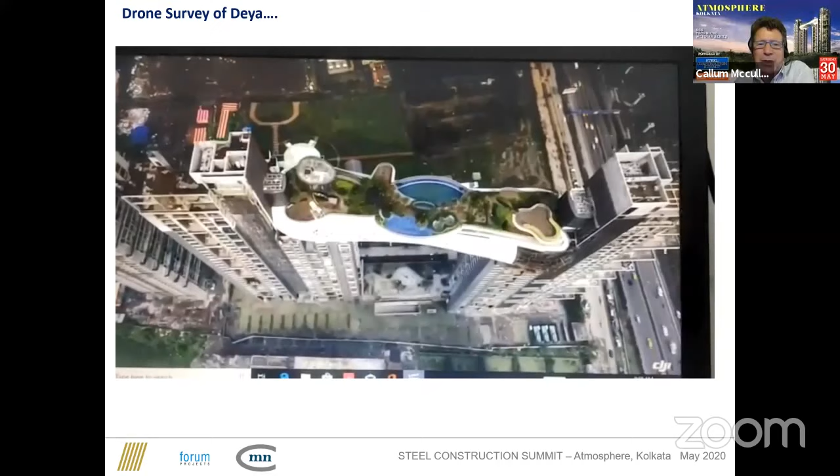We are all very pleased to have taken part in this project. It has been challenging from the beginning, from the days when we only had piles in the ground, from the days we wondered where we were going to get the steel from, how we were going to put it up, how we're going to keep it all straight, what's going to happen when we put the load on from the Deya, could we lift it and lower it properly.

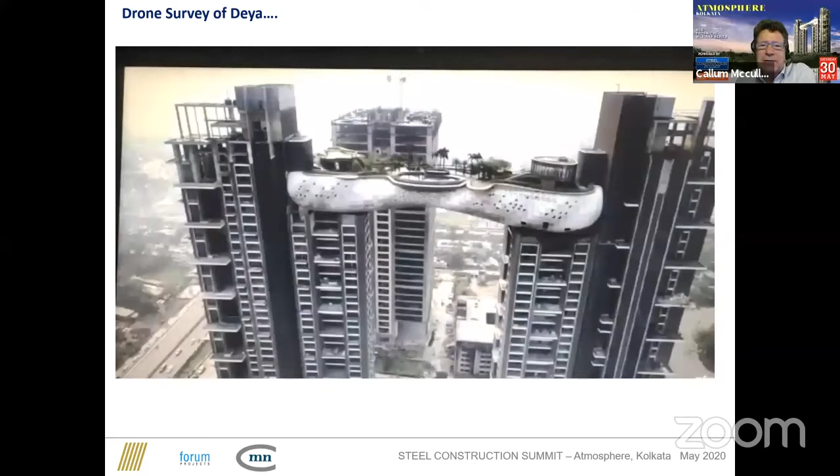Just for your interest, the end sections of the Deya were secured on the decks up above without touching the bearings. Only once we had the structure in the middle did we very carefully lower each of the 4 bearings to drop the whole Deya onto the building. That was a happy day when the whole thing was safe, secure, and started to look as fabulous as it does now.

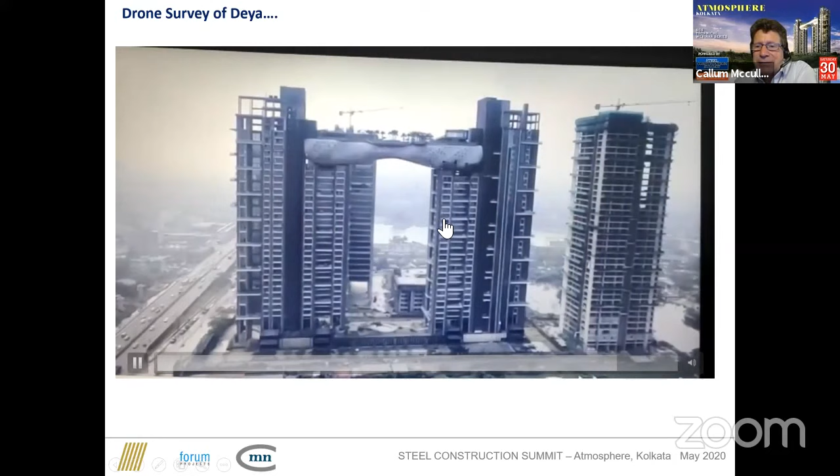It has been a great team effort by everybody, client included. We commend the vision of our client to create something so fabulous as this. And finally, thank you very much for being here.

Okay, I'll take this question. Can we go to those slides for the options? Maybe you want to show that. From a design point of view, starting off this project, we've gone through various options over time, from beginning to the final decision.

So first we thought about the connections from Deya to building being pin-supported by the two towers, but this has very huge issues, which is the Deya will give a very significant impact to the tower safety, especially when the Deya moves due to the earthquake or winds.

So this option one was well reviewed, and for option two we thought, okay, let's assume one side is fully released, and it's just one side which is secured by one tower. But with this, you have a very adverse impact on your control in terms of the serviceability of the Deya you can achieve, because it's very difficult to control the movements, acceleration, and vibrations, also due to some accident events.

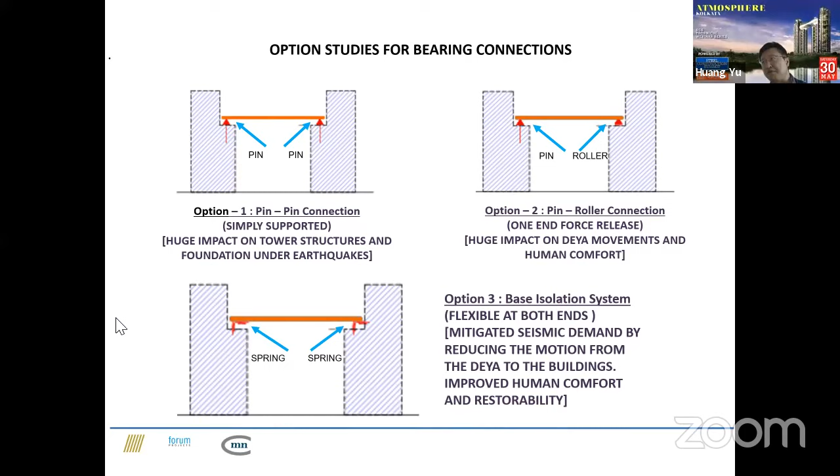Okay, understand. The bearing detail is quite special work for the bearing. So we give the requirements and performance needed to the bearing designer. The requirements are basically in the next slides. Look at slide 44, we can see some of the technical drawings. We need to have the stiffness to control the movements.

Not only this, because of flexibility we also need higher dampers, because high dampers will give the reduction in terms of the motion transferred from the deck to the towers. So this is a very important parameter we need to have, to give the stiffness in terms of the movements and the requirements for the bearing design.

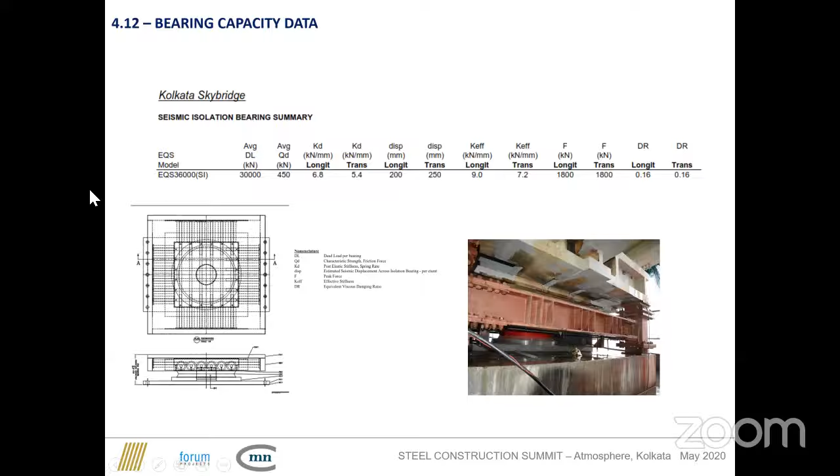In case any participants still feel it needs to be elaborated a bit more, they can always send it in. My second question was, I'm sure it's been done, but I'd like to put it out there - what about the harmonics? There would be harmonic studies done for the buildings as well as for the deck separately, and how was it all connected? I'm sure that's gone into the design of the bearings, because the bearings typically take care of wind damping, earthquake isolation - they're really performing the core function here.

Mr. Huang, if you can just answer that. Sorry, I didn't get your question, can you repeat it again? I was wanting to understand the study of harmonics, whether that was carried out - I'm sure it was - but what extent of impact did that have? Because it would have been separate for the buildings and separate for the deck. And how is it all connected together to give the design criteria for the bearings?

Oh, in fact, actually they are not separate. We call it separate, but it's not separate - they are connected to each other. The bearing is basically to keep the - so to speak - the much higher level in terms of safety, stability, and maintenance. That, to me, is the function of the bearings. Yeah.